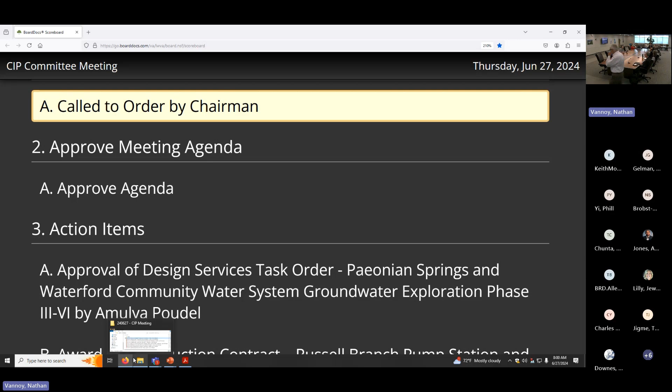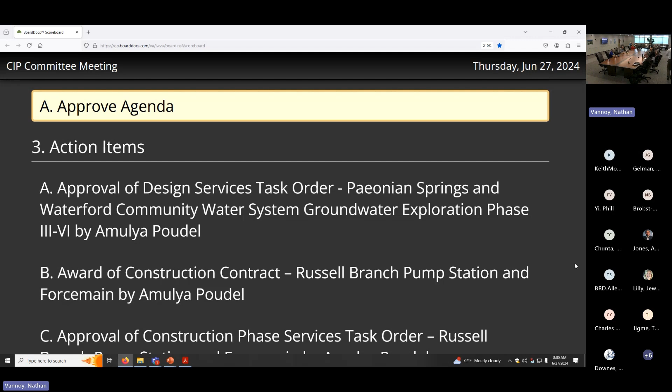All right, let's get started on the first item, approval of design task services task order, Paeonian Springs and Waterford Community Water System groundwater exploration phase.

Let's be sure that's silenced. Oh, it's not.

Good morning, Mr. Chairman and members of the committee. My name is Amulya Poudel, Program Manager with Capital Programs Group. I am here to seek your approval on the design task order for the Paeonian Springs and Waterford Groundwater Investigations Project to Dewberry Engineers.

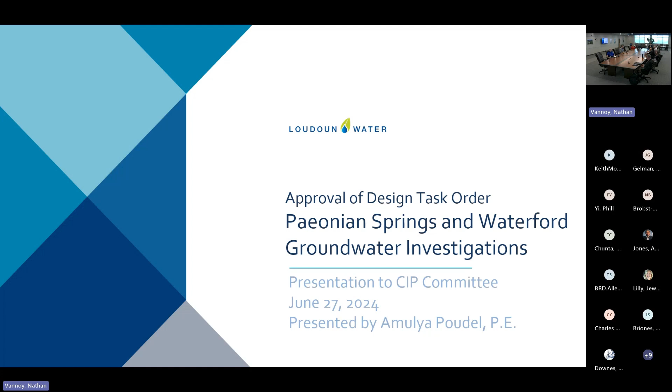This is one of the projects we included in our informational item update in the last CIP meeting and board meeting. This is a project we're carrying out under the memorandum of understanding with the county's water wastewater program. Loudoun Water and Dewberry's cost will be fully reimbursed by the county.

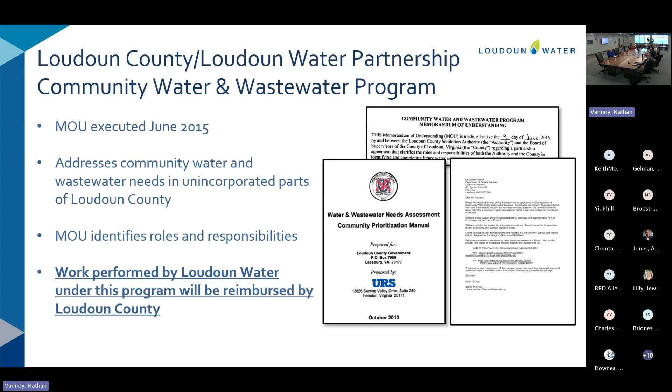The task order here up for consideration today benefits two communities in the area, Paeonian and Waterford. Both have potable water needs. The task order will benefit both projects, so this is a task order that's common to both.

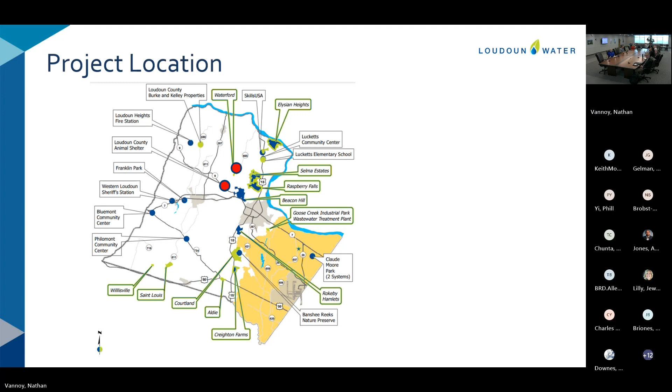Some information about the Board of Supervisors' action on these two projects. In April 2022, the Board of Supervisors approved federal funds to the Paeonian Springs portion of the project. In 2023, the Board approved CIP funds to the design of the Waterford water system project. Along with that decision, the board also directed county staff to look at the feasibility of a joint system that supports both communities.

What I mean by joint system is feasibility of locating a water system between the two villages, and then sending distribution pipes to each of the communities. And on the wastewater side, pumping sewage from Paeonian Springs to the existing wastewater treatment plant in Waterford.

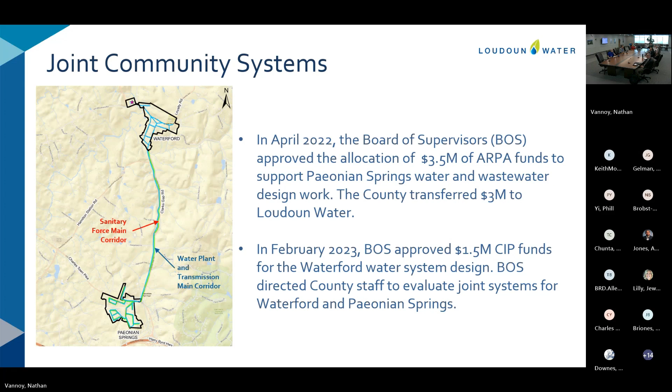So upon the board's direction to staff, we got involved. Loudoun Water selected Dewberry Engineers, one of our on-call consultants, for the project. Just because of the nature of the project and the long duration of the design, we determined that the most efficient way to move forward would be to package the overall project into multiple task orders.

Some of the early phase task orders, aerial survey and such, have already been completed. The board approved, the joint system feasibility study is ongoing, and the board approved preliminary design work back in the June meeting last year. Here we are today to seek your approval on the groundwater investigation. In the future, likely in August this year and early next year, February 2025, we will have two more task orders up for your consideration at the meeting.

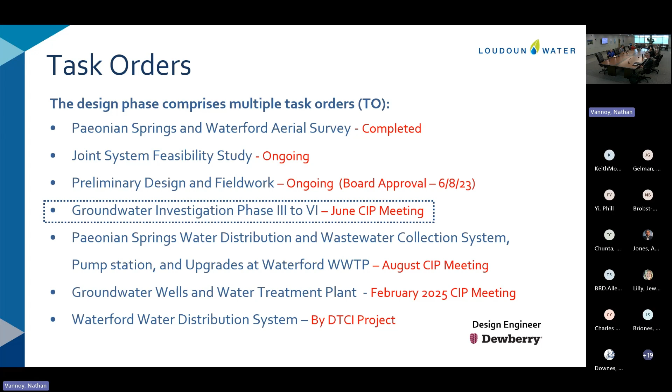In terms of schedule, the overall project goal is to be done with design and permitting by the end of 2026. The task order we're discussing today, groundwater investigation, falls on the critical path of that overall schedule. So this schedule is quite critical to maintain to stay on track for end of 2026 completion of the project.

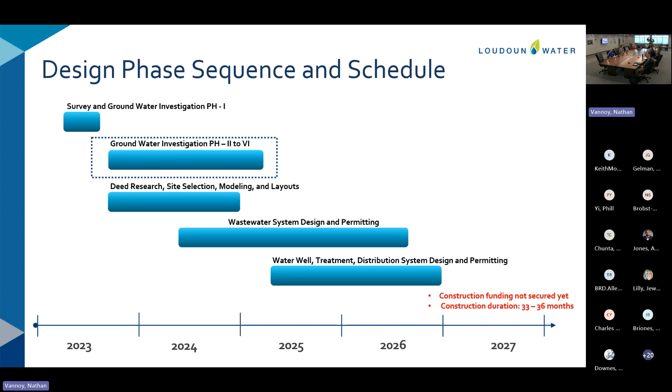So diving a little deeper into the task order here we are for today. This is primarily a groundwater investigation task order. Groundwater investigation is typically carried out in multiple phases. Phase 1 and 2 have already been completed, which included some desktop analysis and non-invasive field work out at the site. This task order here is for the next four phases.

Phase 3 would be drilling some exploratory test wells. Phase 4 involves determining which of those test wells are suitable for permanent use, and those will be converted to production wells. Then there is testing to make sure there is no impact to other existing wells in the community, and it ends with a final hydrogeological report.

Dewberry, as the prime consultant, will be providing oversight. Emery and Garrett is the groundwater consultant for the project. Dewberry is our prime consultant, and they will provide oversight of Emery and Garrett's work on the project.

Questions? I have one: how are you going to determine the effects on existing wells? Are you going to have people going to the houses, or how?

They will actually install monitoring. So they will select existing wells, and I think we're talking about within 1,500 to 2,000 feet of these proposed future wells. They will install equipment to measure what the drawdown is on the monitoring well. So it's like in-field measurement over, I believe, 10 to 15 days — a long-term monitoring of how drawing from these proposed wells would impact the existing wells.

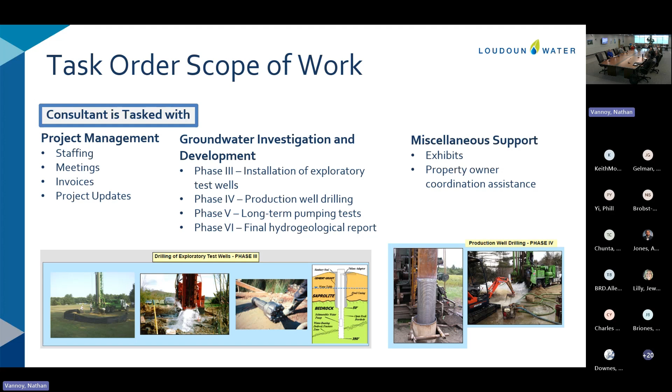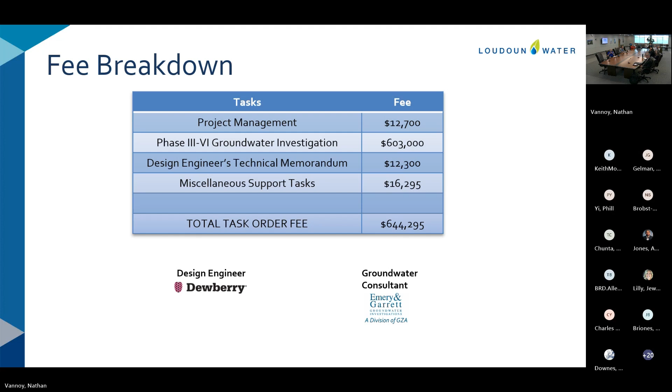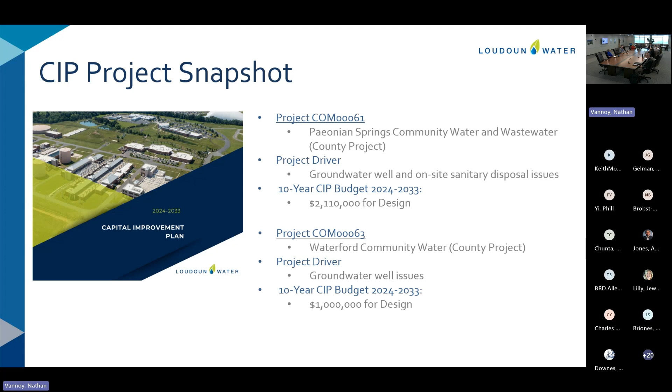I have the motion in front of you, Mr. Chairman. I'll go ahead and make the motion. I move the recommendation to the board to approve the award of a design task order for Paeonian Springs and Waterford groundwater investigation to Dewberry for an estimated cost of $644,295, with an approximate 5% contingency to be controlled by the general manager for a total authorized budget of $677,000. Additional costs will require board approval. I further recommend that this go on the consent agenda at the next board meeting. I'll second. All in favor? Aye.

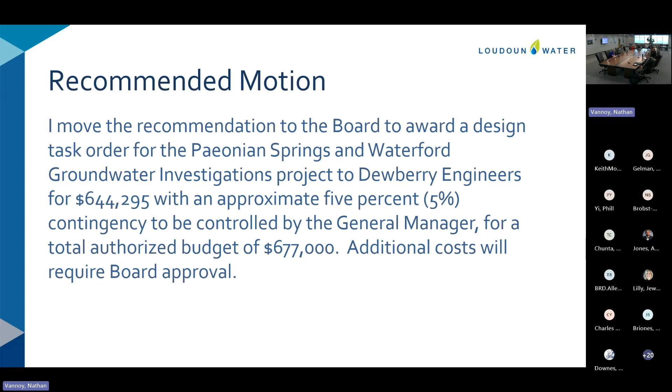Again, this is the consent item. The next one is a sewer construction contract, Russell Branch Pump Station and Force Main.

Good morning again. I'm here to seek your approval on the award of construction contract for Russell Branch Sewer Pump Station project. Just a brief background on the project: Loudoun Water currently owns and operates a small pump station in the Ashburn area, Route 7, Belmont Ridge Road. We have an existing pump station, just under 0.5 MGD, which was built in 2006, primarily to serve development in this area.

With the growth anticipated in the sewer shed and the JLMA portion of the service area that was added to the county, there is a need for a larger pump station, which will be the new Russell Branch sanitary pump station. The new pump station will be located west of Belmont Ridge Road and just east of Goose Creek.

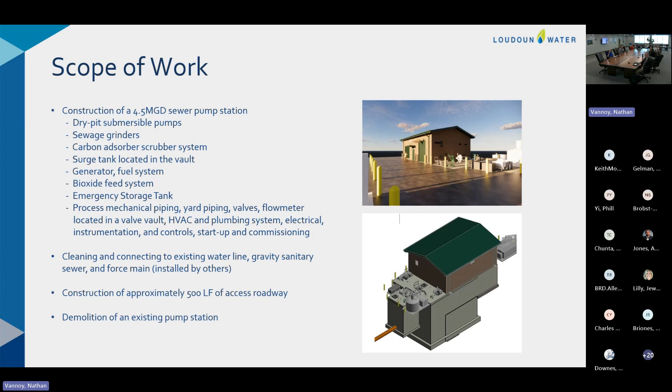The bids came in, I would say, pretty encouraging. If you look at it, the lower 3 bids are a good tight cluster. One of the high bids is a little above the engineer's estimate. Overall, we see this as a fairly competitive bid result.

Archer Western is the apparent low bidder. Archer Western is a contractor well known to Loudoun Water. They are working on the Goose Creek Pump Station project, construction ongoing. They're working on a pump station project for Fairfax, and currently working on a pump station project for Prince William County Service Authority. A well-reputed contractor.

Partly because the low bid was significantly below the engineer's estimate, we sat down with them just to make sure there was no missing of any high-level scope of work. We were very satisfied with their understanding of the project - no concerns on that end.

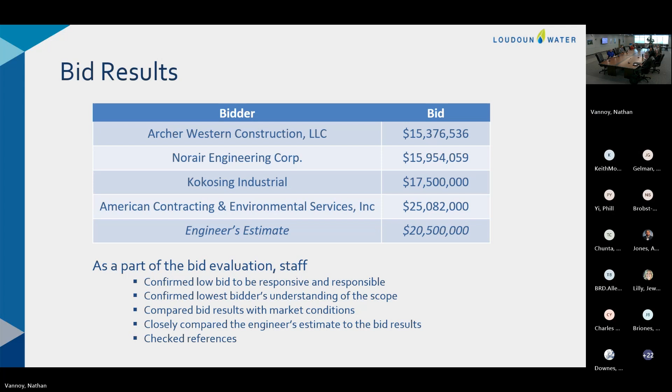So this is my last slide here before the motion. Any questions?

Any questions? Mr. Chairman, motion in front of you. I'd like to make the motion. Chair, may I do that?

I move the recommendation to the board to award the construction contract for the Russell Branch Sewer Pump Station project to Archer Western Construction, LLC, for $15,376,536, with an approximate 10% contingency to be controlled by the general manager, for a total authorized budget of $16,914,000. Additional costs will require board approval.

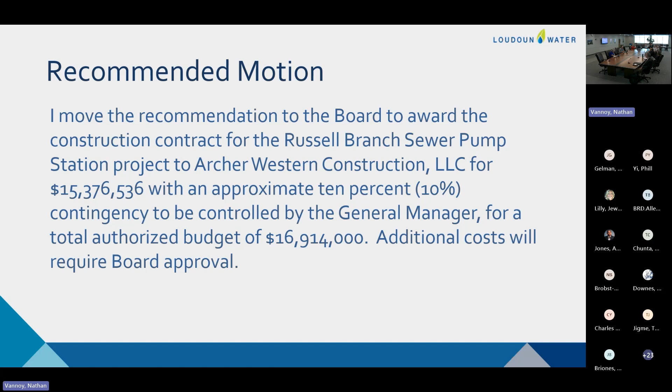One item is approval of the construction phase services task order for Russell Branch. I am here to seek your approval on the task order for construction administration services for the Russell Branch Sewer Pump Station project to HDR engineers. This is a companion request that goes along with the award of the contract.

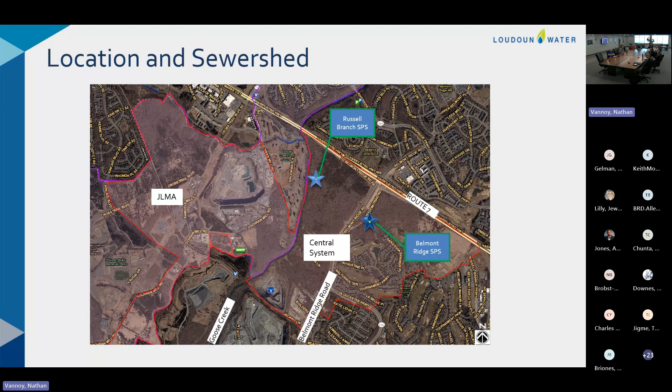A few slides here, Mr. Chairman, are duplicate slides from the other presentation, so I'll just skip through these unless anybody has any questions.

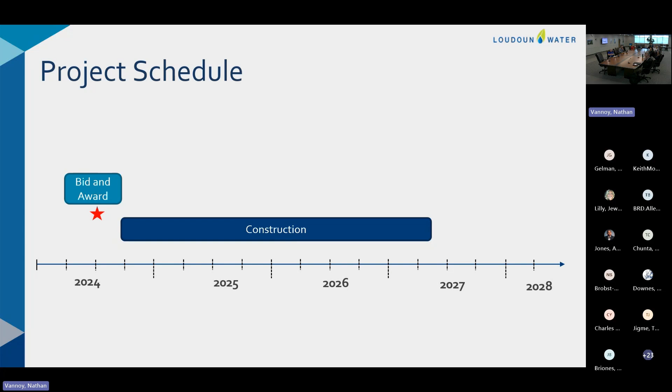Same scope. Just want to point out that this is 33 months of construction, and we're looking at construction admin services from the consultant throughout the duration. This will be a long-term service that the consultant will provide us.

Jumping to this slide, a bit of background on why we need construction admin services on these projects. Loudoun Water will have a dedicated construction team, construction managers and inspectors working on the project. However, we are leveraging the consultant, the design engineer for the project, and their expertise, and we will need their support during execution of this pump station contract.

The Virginia Building Code and the county's building permit have some strict requirements when it comes to specialty inspections and testing. The consultant, through their sub-consultant, will provide specialty inspection and testing services for this project. Bulk of their work will be review of submittals, and their work will help us ensure quality and contract compliance.

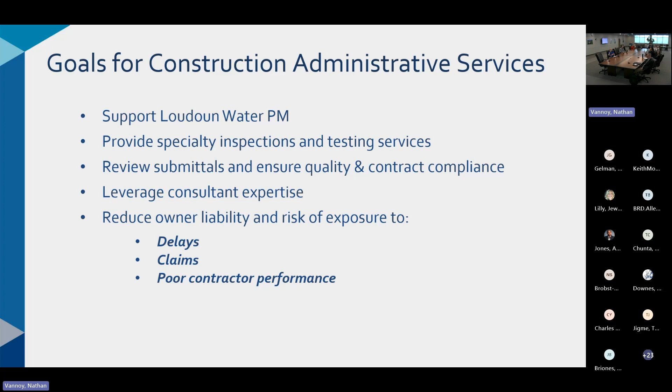Overall, through the use of construction admin services and leveraging our consultant's expertise, this will help us reduce and minimize Loudoun Water's exposure to delays and potential claims, and mitigate poor contractor performance.

Next slide. This is a relatively big project, touching on 15-plus different disciplines. On this slide, I've grouped the services broadly into two categories: construction phase services and operational support.

Construction phase services includes tasks like shop drawing review, inspection, testing, review of RFIs, potential change order and claims review—basically work that's needed for construction to get the pump station built. That's the first set of services.

The second set of services, operational support, is getting ready to bring this facility into operations—a lot of startup and testing, training our staff, and putting together the operation and maintenance manual. This second set of services is primarily to get the pump station ready for Loudoun Water's acceptance.

Just a note, I like this slide. Yeah, thank you, I'm glad you like it.

Who will do the SCADA programming? The contractor will be responsible for all programming within the fence of their construction. On Loudoun Water's side, our in-house staff will do the programming to bring it into the SCADA system.

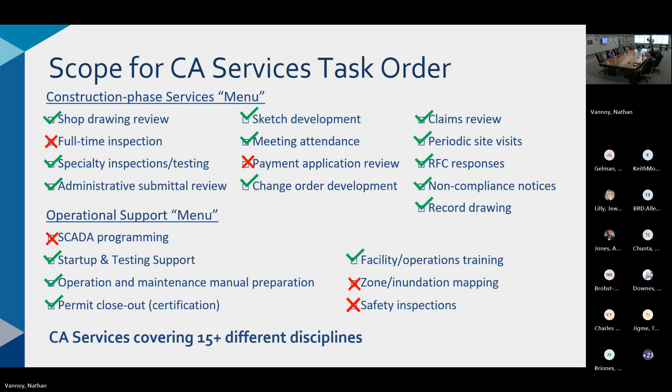Question: where do you divide the line between major infrastructure and minor facilities? At what point does a minor facility graduate into major infrastructure? I'd say something like a brand new 4.5 MGD pump station, along with the dollar value associated, qualifies it as a larger project.

Savita will be bringing two other presentations where we're doing minimal upgrades to existing pump stations. Those would qualify as minor facilities.

Savita, do you want to expand on that? Yeah, I think it's a combination of the project itself and the dollar value. In this case, it's a new pump station with a large dollar value, so we'd consider it major infrastructure—it's a brand new pump station for us. Sometimes, because of the scale of the project, there's an economy of scale reflected in that range; the bigger the project, the more economy of scale there is when it comes to CA services.

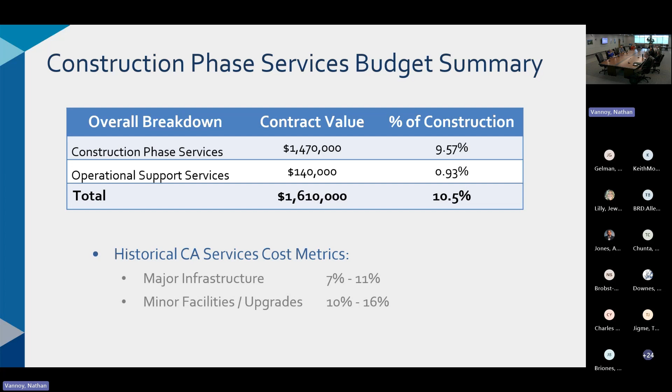So this slide is diving into the fees, but this is still a high level breakdown for the purpose of this presentation. The actual spreadsheet we use is a lot more complicated, with about 28 to 30 different tasks divided by labor categories.

The scope and fee here were built from the bottom up. We looked at every task, for example how many meetings, based on the project schedule. A big chunk of the cost here is submittal reviews.

The consultant prepared this submittal log. The count stands at 462 submittals, and we're using an industry standard metric of about 4 hours each. We're estimating about a third of these submittals would require resubmittal.

Again, we looked at things like the number of site visits. This was built from the bottom up, and where we felt comfortable at the end of negotiation with the consultant, the fee landed at $1.61 million, which is about 10.5% of the construction bid price. That's within the range of 7 to 11% we've historically seen on our major infrastructure projects.

These are all billed hourly. I do want to make clear that the previous task order contract was a lump sum. This one is being provided by our BOA consultant, and it will be time and material with not-to-exceed fees.

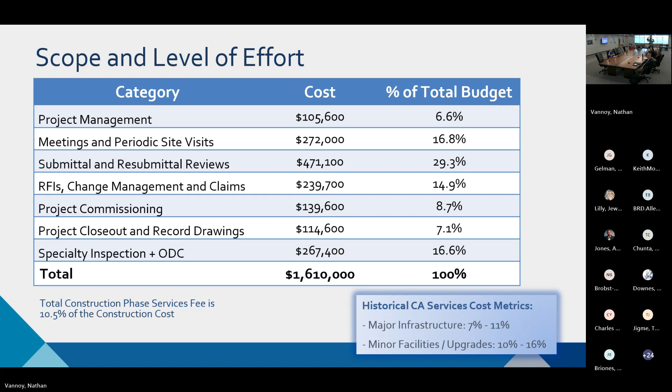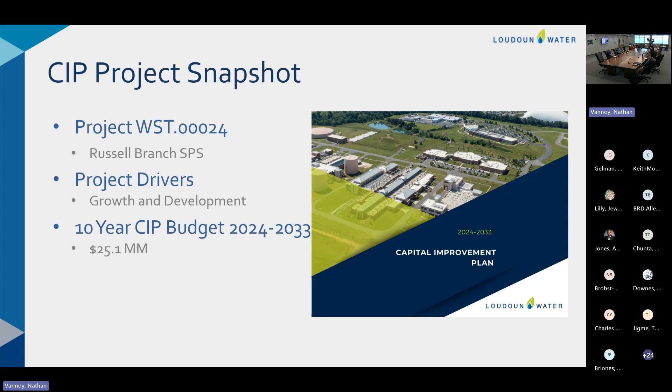No additional questions? The motion is in front of you, Mr. Chairman. Why don't you read it? I'm happy to do that.

I move the recommendation to the board to award a task order for construction administration services for the Russell Branch Sewer Pump Station project to HDR for $1,610,000, with an approximate 5% contingency to be controlled by the general manager, for a total authorized budget of $1,690,000. Additional costs will require board approval.

And what are we talking about? Should this be consent? It goes with the other one. Is there a way to make it that way? Can you tack it on as another item? Which way do you do it, Maureen? Do you tack it onto the other one or let it stand by itself? When you present it, can you present it as a package? I'm not sure how much detail you need to go into. We have most of the board members online.

Mr. Sultan, I wanted to point out, even on the previous item, that the board and the committee have approved the CIP budget and we are well within the CIP budget for this set of projects.

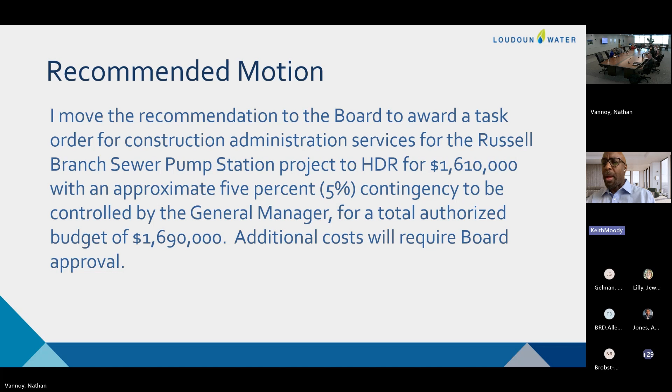So are you suggesting we put both of them on consent, and if a board member wants to pull one off consent they can? Yes, I think that would be appropriate in this case, including the previous item. Okay, let's put them both on consent. I'd make a motion to do that. All in favor? That makes sense, Joel? Yeah, that makes sense. Thank you, it was very good.

Okay, we're on to the next one. We're proceeding at a pretty good pace: the design services task order for the Brambleton 600 zone water pumping station.

Good morning, I'm here seeking approval for a preliminary engineering study for the Brambleton water booster station upgrades. This is a location map showing where our 600 zone is, and diving deeper into where the Brambleton tanks are. There are two tanks, and the water booster pump station is located within one of them.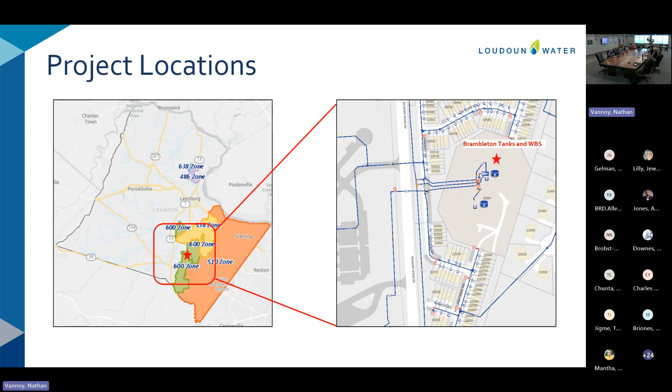This project is primarily driven by growth in the 600 zone and development in that zone. Back in 2021, Hazen did a study on how we can better serve and increase capacity in that zone, and three main recommendations came out of it.

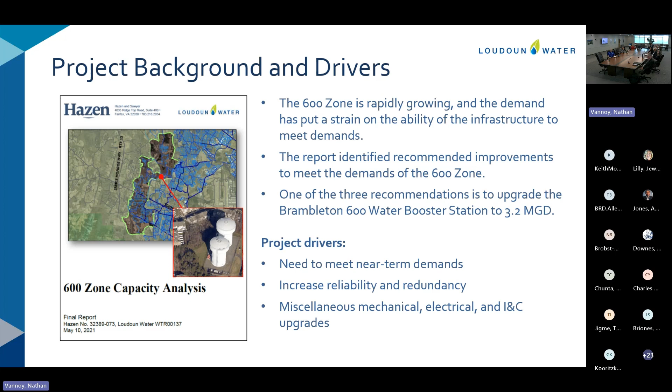The first was upgrades to the Dulles booster pump station, which we brought forward as a construction project earlier this year. There was also additional piping and infrastructure work needed along Route 50, which we also brought forward this year. The last piece is upgrades to the Brambleton water booster pump station. These are needed to meet near-term demands and increase reliability and redundancy in this zone.

The scope of work is anticipated to be very similar to the Dulles work, and this study is going to confirm that. They're going to look at surge analysis and hydraulic modeling, replacing the existing jockey pumps with a new booster pump, replacing existing VFDs, installing a new PLC panel, and other upgrades in the pump station.

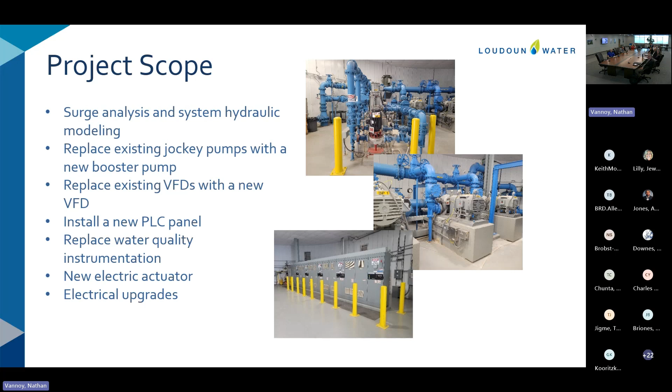The consultant is tasked with a number of things. They'll go back and look at the existing as-built and modifications within the pump station, since over time O&M makes changes within a pump station or water booster station. They'll identify suitable pump models to replace the existing pumps, do hydraulic model updates, develop preliminary pumping and pipe layouts, review electrical service adequacy, and put together a report with recommendations and cost estimates.

I do have one question. In that Brambleton area, there are a number of schools that this feeds. The requirements are 3,000 gallons per minute for high schools and 2,500 for middle schools, I believe, and these service those. So will this enhance the ability to meet that requirement? Yes.

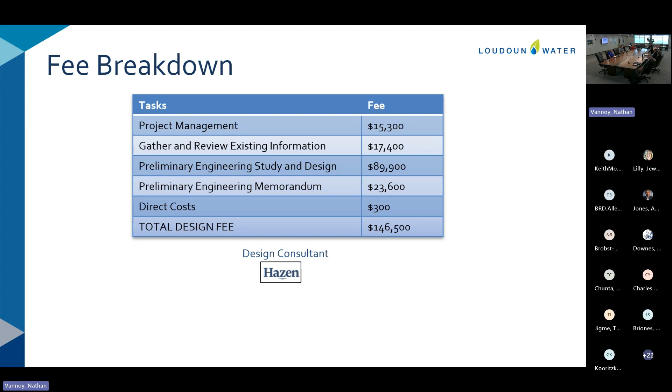The study is anticipated to take about 6 months or so, and then we'll move forward with the design and ultimately bid out a construction package.

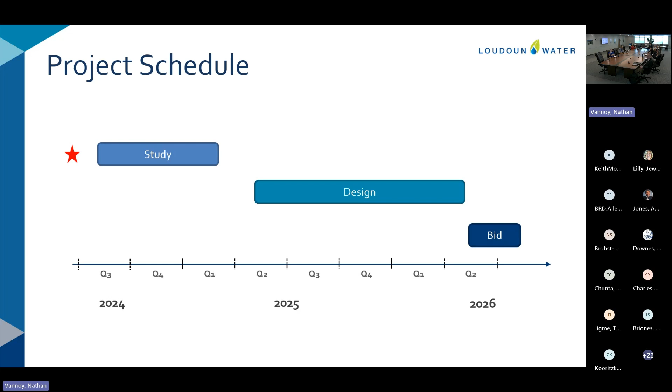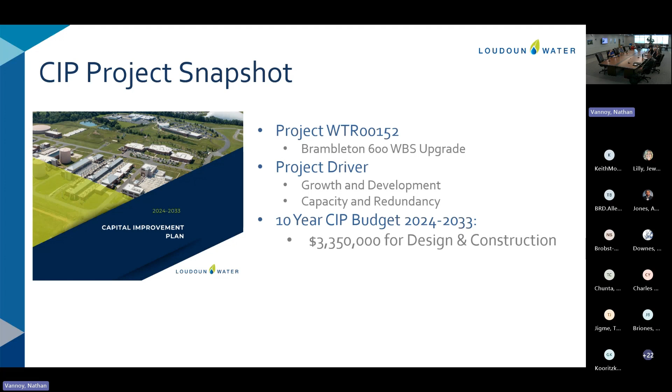With that, I have the motion. Any questions? As long as you're right. All right, I have it in front of me.

I move the recommendation to the board to award a preliminary engineering study task order for the Brambleton Water Booster upgrades to Hazen and Sawyer, Inc. for $146,500 with an approximate 5% contingency to be controlled by the general manager, for a total authorized budget of $154,000. Additional costs will require board approval. I further move that this be placed on the consent agenda at our next board meeting.

Second. Thank you. All in favor? Aye. Thank you.

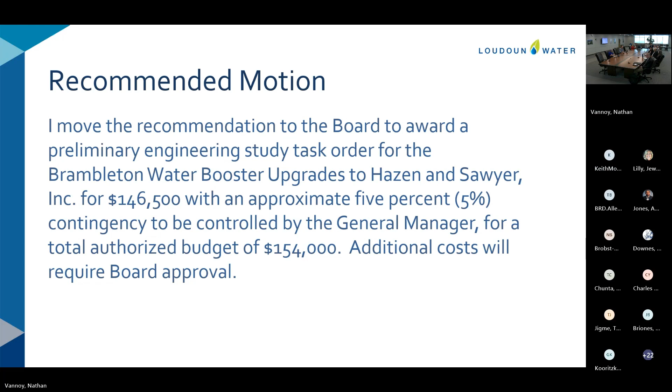Next item, approval of study. We're zooming past these, I'm sorry. Well, we're saving the best for last, right? Yeah. Lower Sycolin. Approval of study task order, North Lower Sycolin Sewer Pumping Station upgrades.

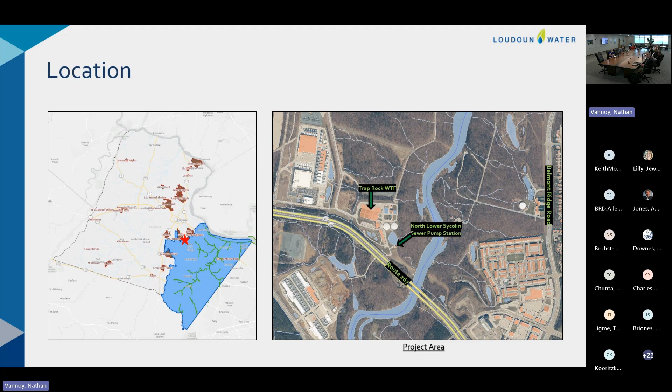When the pump station was... Beautiful plant, isn't it? It's a beautiful plant. It is a beautiful plant.

When the pump station was originally designed and constructed, it was anticipated it would just convey process waste streams from Trap Rock and the parcels directly adjacent to the campus. The installed capacity is approximately 2 MGD, and there are some provisions in place for future expansion.

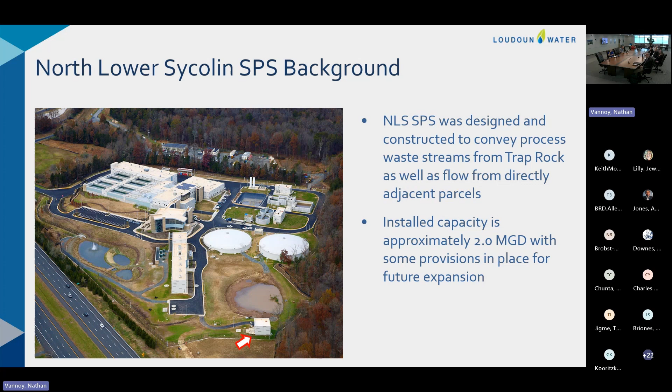However, back in 2019, this is a refrain we keep bringing to you, JLMA came to Loudoun Water, and we now have two new pump stations under construction that will convey flow to the North Lower Sycolin pump station, which were not anticipated when it was originally designed and constructed. The JLMA East, or GCIP, Goose Creek Industrial, is under construction by Loudoun Water, and the JLMA West SPS is under construction by a developer at this time.

Both of those pump stations will convey flow to North Lower Sycolin, and we've been looking at upcoming flow projections. By 2027, we anticipate we're going to be about 1.7 MGD, reaching the capacity of that pump station. By 2031, the projections show 6.5 MGD. Even with all that construction, it'll happen that slowly?

Their projections are inexact, right? Yeah, I understand. I've just driven along cross trails and seen a lot of construction going on.

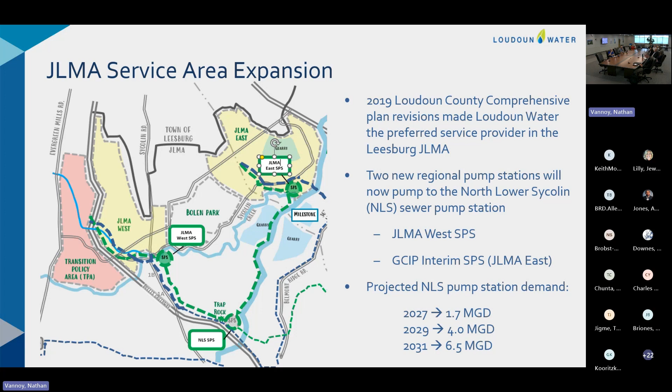This is the first phase of the work we're going to be doing. We're intentionally breaking this up because we need to figure out what's happening at that pump station. We'll document the existing waste streams coming from Trap Rock, look at ways to shave the peaks of the flow so it's more consistent coming into the pump station, and do field testing of its current capacity. There's some concern by O&M that the pump station, rated for 2 MGD, may not actually achieve that, so we want to confirm it.

We'll look at what we can get out of that pump station without major structural upgrades—replacing impellers, pumps, or piping, but not expanding the footprint. Finally, we'll do a force main hydraulic surge analysis with two scenarios: the first is existing conditions, and the second includes adding a second, parallel force main. There's some concern that downstream conveyance is a bottleneck for this pump station.

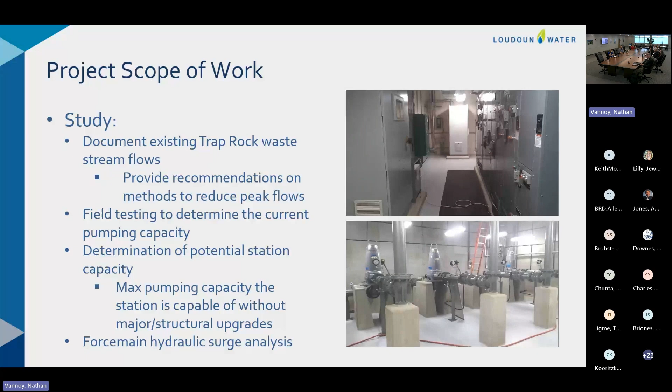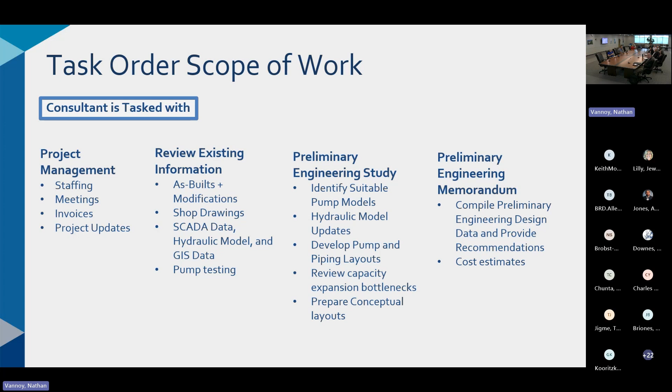This is the consultant's scope of work, similar to the last task order I presented. They'll review the existing pump station, look at the as-builts, and figure out any changes made since it was built. Then they'll look at different pumps that could be used, update the model, develop pump and pipe layouts, identify bottlenecks or concerns, and prepare conceptual layouts and a report with recommendations and cost estimates. We'll bring forward a second task order for the design.

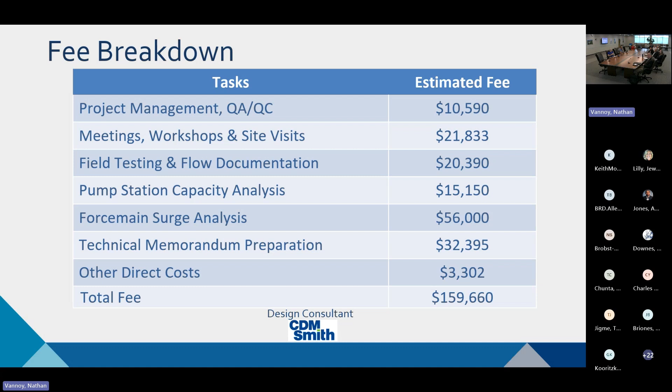Here is the fee breakdown. The force main surge analysis number is a bit higher than the rest of the tasks because we're doing multiple scenarios and looking at future options. This is the project schedule—about a six-month study period before we get into design, and then ultimately into bid and award of construction.

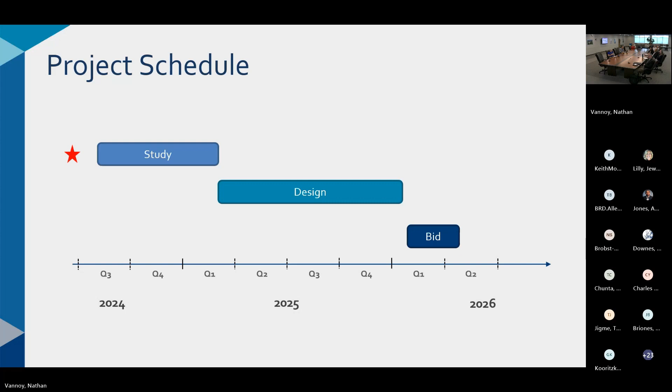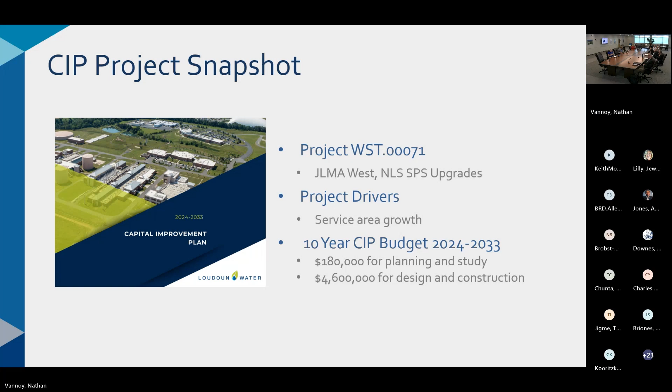With that, I have the motion. Any questions? I move the recommendation to the board to award a study task order for the North Lower Sycolin Sewer Pump Station upgrades to CDM Smith for $159,660, with an approximate 5% contingency controlled by the general manager, for a total authorized budget of $168,000. Additional costs will require board approval. Further, I move that this be placed on the consent agenda at the next board meeting. I second that motion. All in favor? Aye. Thank you.

Now here comes the biggie. We don't need a break. Approval of design services task order, completion of design task 2, Broad Run Water Reclamation Facility Phase 3. All right, good morning.

Knowing that we were going to bring this design task order to you now, we spent a lot of time at the recent board workshop on the background of Phase 3 and why we're moving forward with this project. So we'll give a program update, but the focus today is really on contracting and task orders we've already issued, to help set the stage for this task order and what's coming in the future.

I have a lot to talk about on our construction costs. We're going to bring you along on the journey of this very long capital program and what we're seeing with construction costs as we prepare for bidding some of the largest capital infrastructure Loudoun Water has undertaken. Then we'll end with the actual design task.

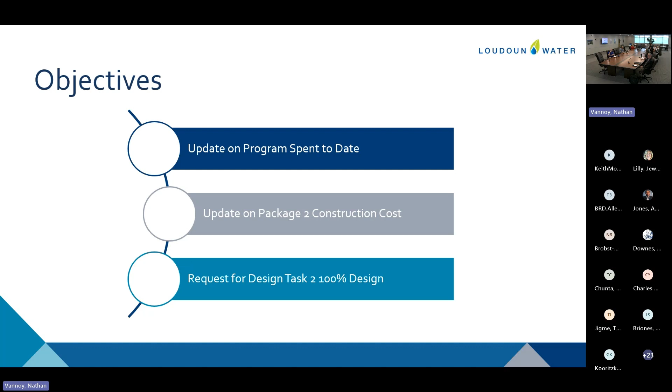Our new greenfield construction is where the majority of the cost lies in this project, and it really is a lot of concrete. This is different from Phase 2, where we were really modifying a lot of existing facilities and buying new equipment, but we didn't put a lot of new infrastructure in. This is large scale, and as you know from our tours, we really are utilizing a large portion of the available land on our site with this expansion.

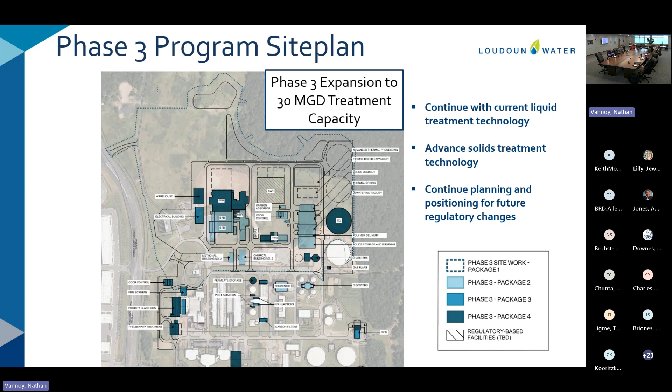So we've started to modify what we typically show the board as our traditional process flow diagram for Broad Run. Historically, we had shown you this line right down the middle because this encompasses all the primary treatment processes to treat water, which we went through in detail. What we're going to continue to show you is what we're building in each package. If a facility is new and we're pouring new concrete, we've shown it, and this is all on the north side of the site, off to the side, our new facilities. If we've highlighted it in blue, we're going to come back and modify those existing facilities to get expanded capacity.

And so package 2 today is focusing on our solids treatment capacity. This is the most time-critical aspect of the Phase 3 project, so we broke it out into the first construction package. We have historically seen our loading to the plant increasing higher than flows, so by building this infrastructure we are increasing our treatment capacity. We're just not going to permit it yet. There's no need to process more flow urgently, but we do need to be able to process more solids.

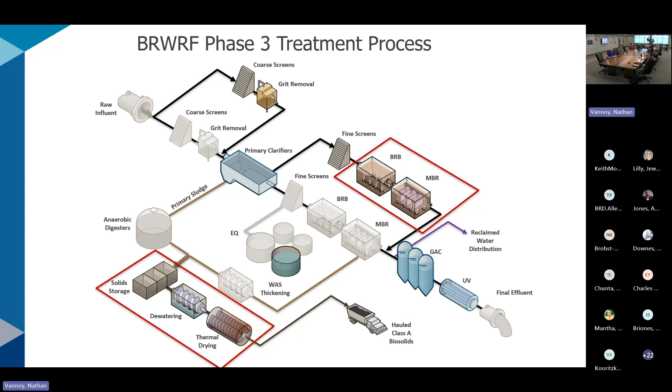Back in the planning phases, when we started seeing that we were going to need more digestion capacity, we made the decision to move to building a thermal dryer instead of a digester. This is not only an expansion of capacity, it is also an advancement in treatment. We will produce a higher class of biosolids, going from class B to class A. We will produce a dried, pelletized product, which is much more attractive to potential land appliers, as well as reducing the total amount of material that must be hauled, which greatly reduces our operating costs.

So the overall schedule for the Phase 3 program we talked to you about previously. This is longer than our current 10-year CIP to get all of this infrastructure built. Package 1 is the site work - that is getting a contractor out there to level the site, get stormwater control in place, and have everything prepared for the large-scale work. That is already under design. That design contract was issued in late 2022.

And as part of that task that we issued, we also said we want to do just 30% of the package 2 design. The reason why we wanted to take a small chunk is a little bit like some of Savita's studies - it was to make sure we were firm on the scope that we wanted in package 2. The more certainty we can get, the more we can bring in those design fees. If we move forward to a design with a lot of unknowns, your consulting engineers say, well, I have to have more alternatives at 60% or 90%.

Don't you need that in order to do the site work? We were able to identify how much space we would need in our early planning tasks that were already completed, so there won't be any more change in the site prep. But just to clarify, that's not putting pipe in the ground - that is just earthwork. Yes, the package 2 contractor will come back and put pipe in the ground.

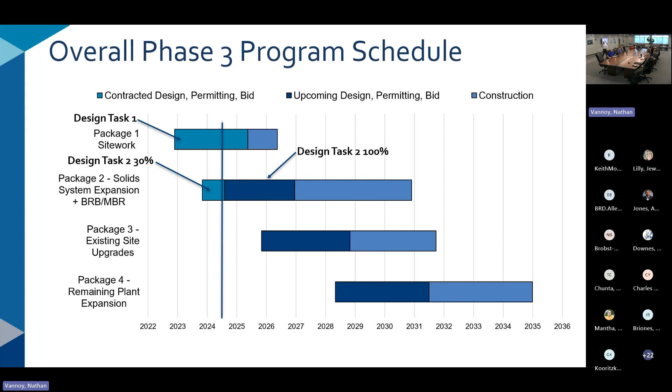So today we're going to be looking at getting to 100% design on design task 2 and bidding that package. This is about a 22-month period that we're going to be working on this, and then we will come back in late 2026 with the bidding and construction award of that first package.

Our request for design task 2, we want to dig into a little more detail on what is actually in package 2. We talk about solids processing, but it's a large majority of the new facilities going in the north: space for our biological reactors and membrane treatment, and a very large building for the thermal drying facility. This is a very mechanically intensive process that will be one of the largest structures going in on site. We also have new supporting facilities, including chemical facilities to support this new treatment, as well as odor control and what is called a plant waste basin.

This takes all the recycle flows from this facility and sends them back to the head of the plant so it can go through for retreatment. All of the flow processed here will still follow our traditional process from our influent pump station, come around through preliminary and primary treatment, and then split. Some will go to our north facility and some to our south facility, but all solids will be sent to the north for treatment. So there will be modifications in our existing solids facilities to tie in this new dewatering and drying facility.

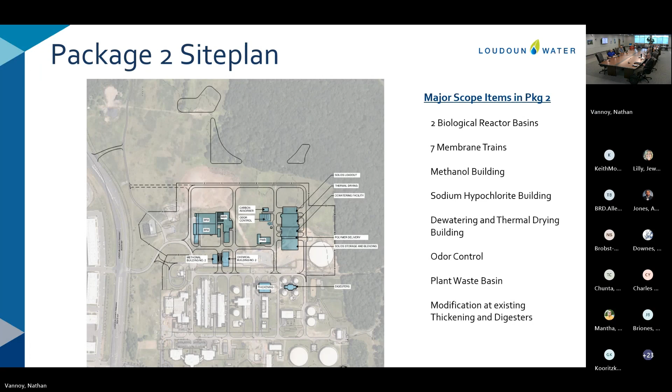So construction cost is one of the largest challenges administratively with this project right now. We have to get this designed and built, but we want the board to understand what's going on with the cost of phase 3, because when we bring forward the 10-year CIP, there are a lot of discussions about the increases seen recently. Much of that is driven by what happens with the phase 3 construction, and the majority is the JLMA as well. What we're experiencing is the highest level of cost inflation any of us have seen, and phase 3 came along at a very tough time in the construction industry to experience this.

So in 2022, we were wrapping up the planning phase. We decided how much capacity we needed for phase 3 and what technology we were going to build.

That is your first level estimate. All of these were done per the AACE cost estimating guidelines. At a planning level, you have to use parametric costs. We've talked to you about this before, but it's saying that in the past it

cost Loudoun Water X number of dollars per million gallon of membrane capacity. We looked at other utilities, dryer facilities. It cost them X number of dollars for dryer capacity, and we scaled that and came up with, for package 2, a planning level cost of $200 million. Per the cost estimating guidelines, that has a very large plus or minus window on it because it is just parametric. There weren't any building layouts that you could give a cost estimator, no footprints or even building material types

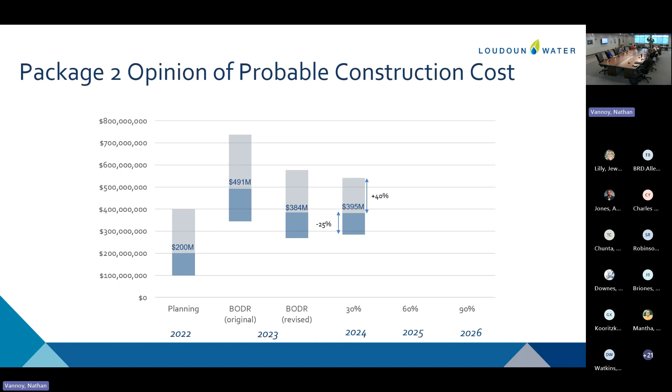Okay, so we will continue to bring you updates on the construction costs and possibly even industry updates as we're seeing things like going on with electrical. But today is actually just about the design fee to get package 2 to 100% design.

So similar to the other projects that you've seen today, this is a summary of that very large fee, but we do get these fees in breakdowns of individual task line items, number of hours per staff, and have gone through and spent a lot of time working through each of these line items to get it to a level that we feel is appropriate for the work being done.

So project management is within a normal range of 2 to 2.5% of this project, but we went through and did meeting by meeting, how many meetings do we think we're going to need, what level of coordination is required. 60 and 90% design is the bulk of the work.

This is approximately 20 FTEs working throughout those design periods to provide really the detailed design, so our structural design, our electrical design, but they're also producing the plans and specifications at that stage. For this contract, that will be 2,000 construction drawings, over 500 specifications for all the facilities that will be designed. So while these are within normal ranges, they're just much larger dollar values due to the scale of the infrastructure we're looking at.

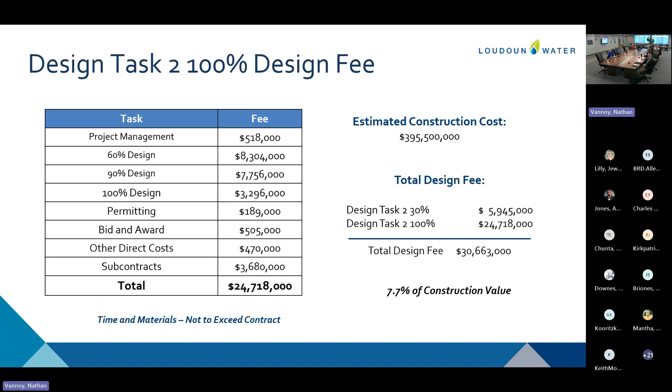So we pulled Loudoun Water infrastructure that we felt was similar to this type of work. So it's really all of our treatment plant work. Maybe a little bit to your question before, of do we break things out from what is smaller scale or modifications? Really building a treatment plant is different than building the Russell Branch pump station.

So we wanted to take projects with similar levels of complexity. So we brought the TRAP design, which was original greenfield design of a water treatment plant, to construction cost at the 30% estimate, because that's what we have right now is our 30% estimate. The design fee was about 12%. Now, when you get to a final construction cost, that cost estimate can either go up or down. So we always come back and check and say, well, the design, what was it based off the total of what we spent? So because TRAP's cost went up, that design fee went down a little bit, but it's still within that range of 7 to 11%.

Broad Run, through its original construction, we had the interim biosolids project where we put in 2 new digesters, our phase 2 expansion. They've all been in the realm of 8%. Again, the original construction of Broad Run was thought to be 134 million. It ended up at 190. So that percentage came way down in the end.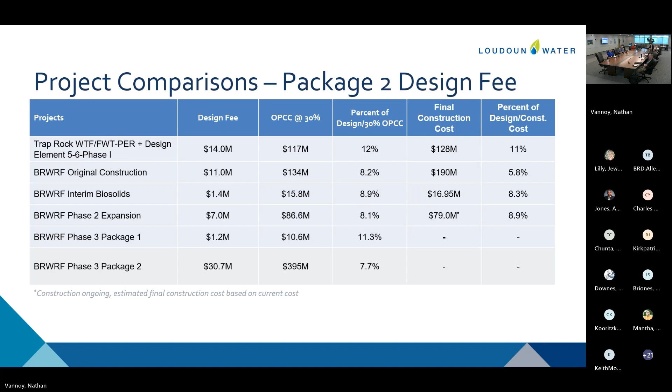And so I have a motion for you, which I am absolutely sure will go on the action agenda, but. Lots of issues. Are there any questions?

I move the recommendation to the board to authorize the general manager to execute an amendment to the professional services contract with Hazen and Sawyer for the Broad Run water reclamation facility phase 3 expansion project for design task 2, 100% design, with an estimated not-to-exceed cost of $24,718,000, and authorize an approximate 5% contingency to be controlled by the general manager for the total authorized budget not to exceed $26 million. Additional costs will require board approval.

I further move that this go on the consent agenda at the next board meeting. Is it a big enough item? Should it go on consent or should it go on action? It's in the CIP. We've talked about this a lot, and we've talked about it at all the other meetings. If a board member wants to pull it off, they can pull it off. Unless we're exceeding any of the thresholds already approved in the CIP, I think. All right, and this is recorded, and any board member can watch it also.

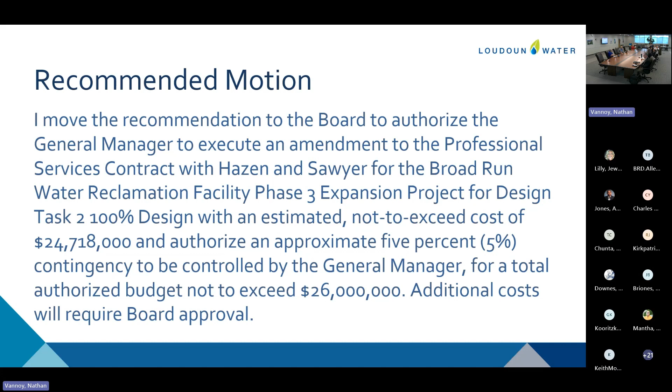That's very good. Yeah. As usual, I understood what you said.

Okay, the next item, we're past an hour. I assume nobody wants to take a break. I would love to have a cup of coffee. Want to take a 5-minute break? Anybody else need a break? I'll just make the coffee while you continue.

Okay, the next item is award of a contract for the pre-procurement of the Broad Run Water Reclamation Phase 3 project membranes.

Good morning, my name is Rick Zafel, and I'm going to talk us through this last presentation for the pre-selection or pre-procurement of membranes for the Package 2 project. My agenda: justification for why we're pre-selecting, and justification for using a sole source. We'll look at the membrane pre-selection schedule and see how that ties into the package 2 project schedule, review our cost components for the pre-selection, and wrap up with the motion.

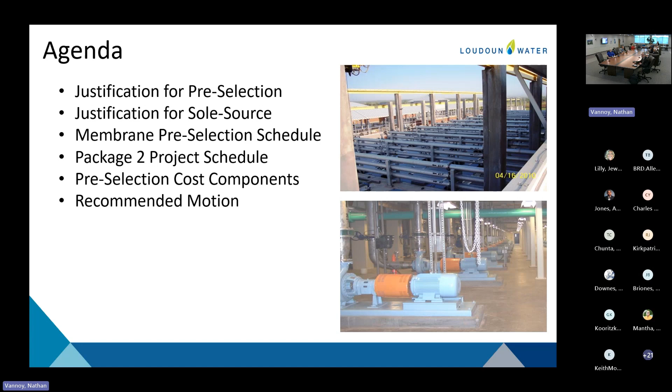So why are we pre-selecting membranes? The membrane process is a key component of the package 2 project. From the last presentation, Kendra mentioned solids was one key portion, and the membranes, or biological improvements, were the other large component. The membranes are highly specialized equipment. In addition to the hollow fiber membranes in the tank, you also have ancillary equipment such as pumps, valves, instruments, process control equipment, control panels, and a compressed air system. All of this has to tie into other facilities provided by other suppliers, such as an air scour blower system and a chemical system. So this is a very complicated, specialized equipment package.

The benefit of pre-selection is it gives early shop drawings that we will incorporate into the design of the package 2 project. It allows consistency of design—we don't need an open design accommodating multiple vendors, we can focus on the single vendor throughout the design process. It also establishes clear lines of responsibility between the pre-selection vendor and the contractor. The beauty of the pre-selection process is the contractor still handles all the equipment; Loudoun Water doesn't take possession of it. The contractor ultimately takes possession and is responsible for installing it, so we don't have to own or furnish anything through this process, which is very beneficial.

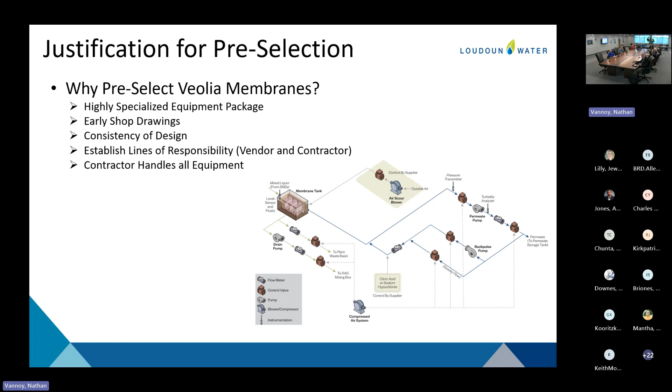So the next big question is why sole source Veolia membranes? These hollow fiber membranes were installed in the original Broad Run construction. The same type of membranes are being installed in the phase 2 construction, which is underway right now, and the plan is to install these same membranes as part of the package 2 project, part of phase 3 construction. On the vendor name: originally these membranes were installed by GE Zenon, the manufacturer. They were bought by Suez at some point, so the phase 2 project membranes are Suez membranes—same membranes, just under Suez. Now Veolia has bought Suez, so they're Veolia membranes—again, same membranes, just a different company. We've had a couple of company switches as we've moved forward.

So back to our question: why sole source Veolia membranes? Because this was a sole source pre-selection. Why sole source? It's a complex and proprietary technology that's been at Loudoun Water for 16 years, with a good history of successful treatment using these membranes, a very important component of the treatment process. This is a proven vendor able to mass produce these membranes in large quantities for a large capital project like package 2. Going with this vendor, we wouldn't have to pilot or spend additional effort piloting other vendors, or leave the design open for other vendors—it allows us to focus on a concentrated design. Other reasons for sole sourcing include familiarity with operations and maintenance, and standardization or consistency of spare parts, which helps foster that as well.

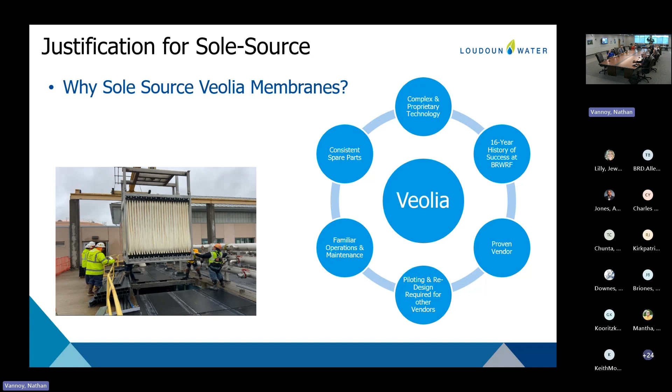All right, so the pre-selection schedule. What did this pre-selection look like? It started with an RFP that was drafted the second half of last year, and we finalized it and issued the RFP in the first quarter of this year. That RFP was issued to Veolia. This was a sole source pre-selection.

In the second quarter, we received Veolia's proposal and have been in negotiations with Veolia for several weeks, with the goal here to award the contract to Veolia to pre-select these membranes.

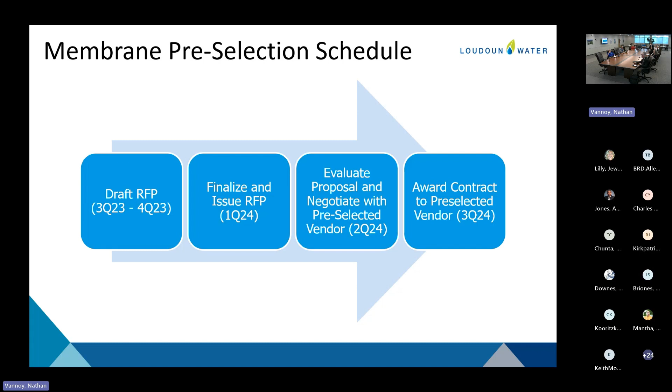Looking forward, once we enter the pre-selection contract, there are two parts to it. The first part is the special engineering services, or the shop drawings I mentioned on the first slide about why we would pre-select. We would receive those shop drawings from Veolia, and they would be incorporated into the design. That's the time frame for part one.

Then we would go out for bid in the mid-2026 timeframe through the end of that year. And then in construction, the second part of the pre-selection takes effect, where the equipment is fabricated, brought to the site, and installed.

That second part all happens under the contractor's control. That's the piece assigned to the general contractor. They're responsible for the equipment, for getting it to the site, making sure it's fabricated and installed correctly. And the cost is included in the bid document, in the contract price with the general contractor. That's correct.

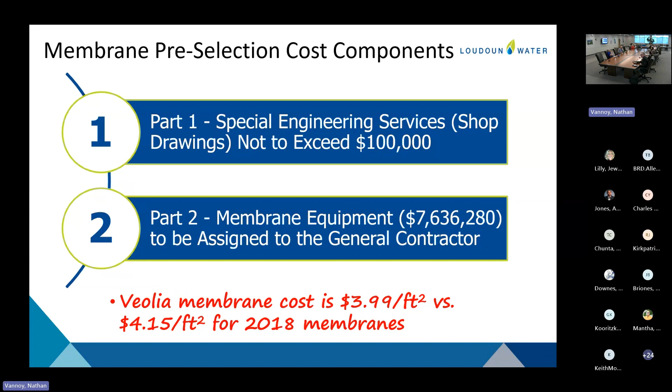When would the membrane be delivered? It would be in the middle stages of construction - in 2028, 2029, that's when they'd arrive at the site for installation. So would we be paying the money before it's delivered? Not for the membranes, no - only for the special engineering services. So really all the board is approving today to expend is the $100,000, and we've pre-negotiated the $7 million that the contractor will pay. The procurement agreement that captures all this will certainly list that second part, but that's a future item - a 2028, 2029 timeframe.

Between now and then, if there's a major breakthrough in the technology, even using the same form factor, we would benefit from that. We did that in the 2018 procurement - we upgraded to a newer model of membrane that became available during construction.

Just curious, how many other competitors exist in this ecosystem - is it one other, five others? At this scale, you could say it's one or two. That's why when we competitively bid it, only one of them even wanted to bid, and they were much more expensive. It's just such a specialized product, and at this bigger scale, it's a tough market.

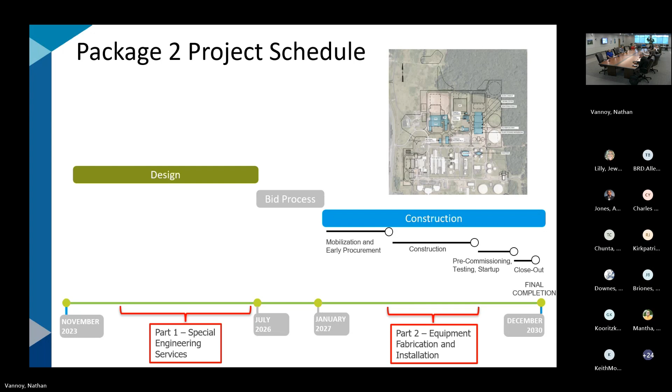Okay, got my motion here we go. Any more questions you want to ask? I have no more questions.

I move the recommendation to the board to approve award of a contract for design of the Broad Run Water Reclamation Facility, Phase 3, Package 2 membranes to Veolia for $100,000. In addition, I move the recommendation of the board to approve an award of a contract for the Broad Run Water Reclamation Facility, Phase 3, Package 2, membrane equipment and services to Veolia for $7,636,280, which will be assigned to a general contractor. Further, move that this be placed on the consent agenda at the next board meeting. I second. All in favor? Aye. Aye.

Okay, the only thing left over was a capital spending summary report, which I looked at - looks like we're dead on. I doubt there'll be any questions. I think it was 96%, if I remember correctly. I can't believe it - gosh, it's an hour and a half and we got through everything. Anybody have any other questions?

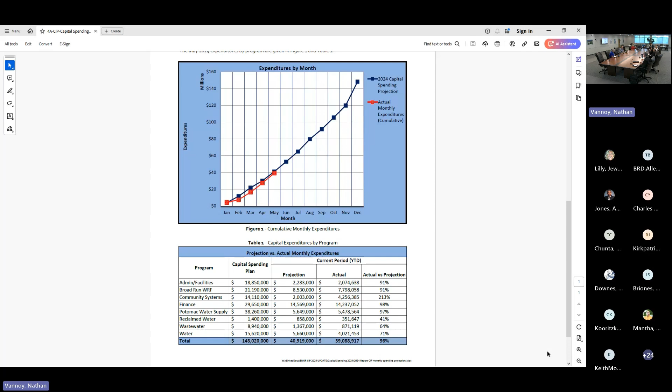What's up on our next meeting in August, right? We have another meeting in August? Yeah, what's on the agenda for that? The tentative agenda right now is another task order for Paeonian, this would be the actual design, another pre-procurement for phase 3, and then potentially the preliminary engineering report task order for the expansion of Trap Rock, and obviously the informational reports. Another 90-minute to 2-hour meeting. Hopefully not that long, but we did a good job today.

Thank you so much for putting out the information and the reminders to pre-read. We appreciate that - that was very well done.